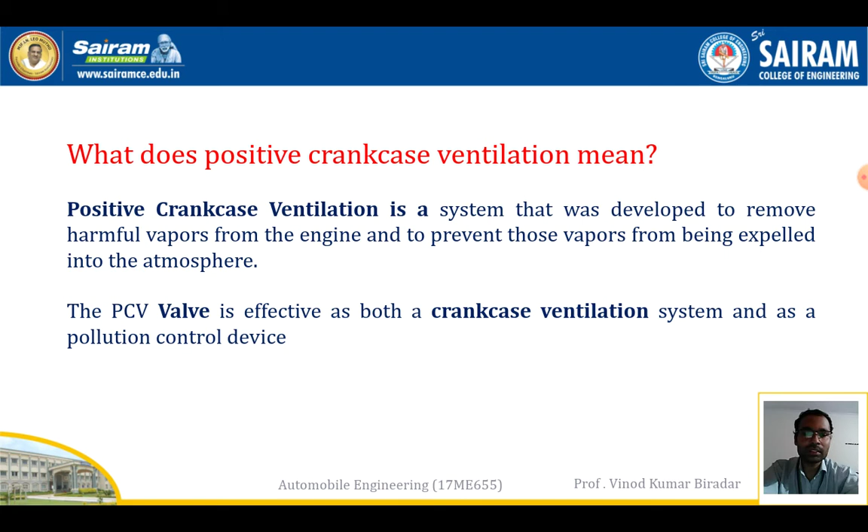It is shortly called PCV. The PCV valve is effective as both a crankcase ventilation system and a pollution control device. Is crankcase ventilation necessary in all vehicles? Yes, it is necessary. A positive crankcase ventilation system is a requirement for almost every gas-powered combustion engine found in cars. So it is necessary in almost all engines, but we have to use it properly.

So how does a crankcase ventilation system work? What is its main function? The main function is to allow the blow-by gases, consisting of the combustion products and the oil vapors, to be vented through a positive crankcase ventilation valve out of the crankcase. It separates the oil drops and oil mist from the ventilated air. Blow-by gases means harmful gases released by the vehicle, so it will control that. So we will study the working of this crankcase ventilation system.

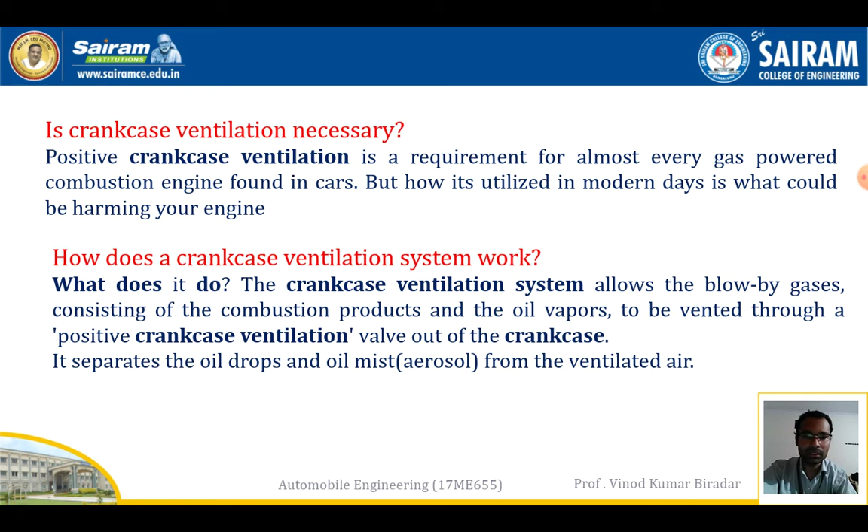So how do I lower the crankcase pressure in a vehicle? The best way to minimize the crankcase vapor pressure, the blow-by gas, is to seal the engine as efficiently as possible from the cylinder pressure. One way is to minimize the ring end gaps by custom setting and the end gaps on the top two rings to fit the way the engine will be run.

So normally in the combustion engine, the piston is in the cylinder, and it is not completely tight. Through the gap between the piston and the cylinder, the blow-by gas will be expelled out. To reduce that, this PCV valve is used.

Can the PCV valve be cleaned? Yes, if your vehicle's PCV valve is not working, you can clean it yourself by immersing it in a carburetor cleaner or solvent from your auto supply store. If there is a gummy deposit or discoloration on the valve, you can clean it yourself. No problem for that.

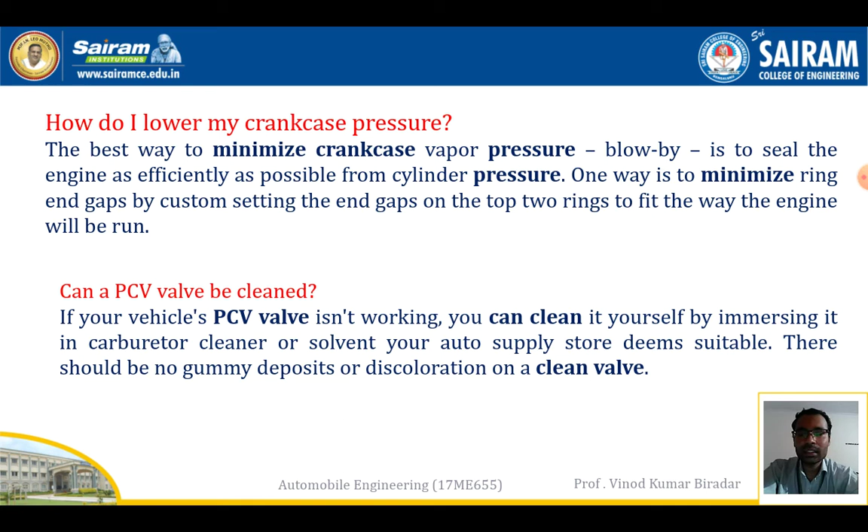Now from that gap, even in a new engine, gas escapes, also known as blowby gas. That gas, called blowby gases, will be released from the piston end. Older vehicles had a breather tube that vented these gases into the atmosphere. In those days there were no PCV systems; they released the gases directly into the environment, and that affected health. Modern vehicles are fitted with a PCV system, so nowadays it is not a problem.

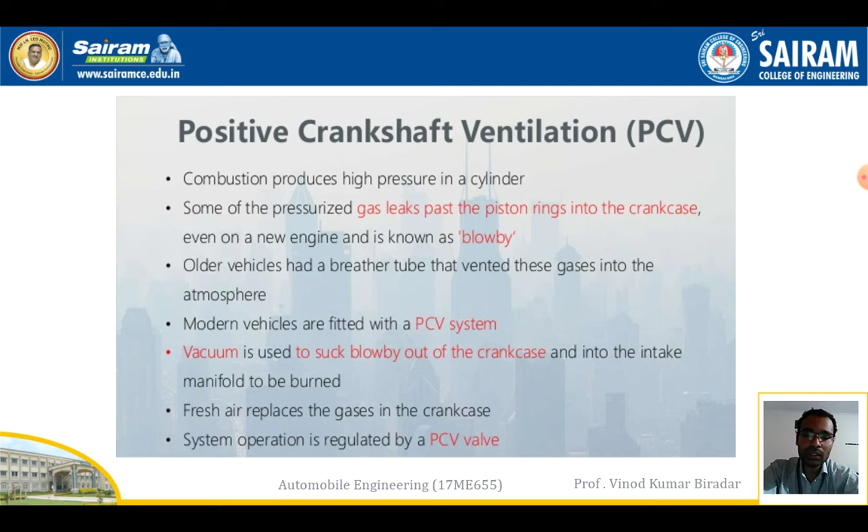The PCV valve is a spring-loaded device with an engine-specific orifice size, and the valve is sealed shut when the engine is stopped to prevent backfires. At engine idle speed, the maximum vacuum defeats spring pressure and the plunger moves to the other end of the valve, allowing a minimum vapor flow. At normal engine speed, the lower vacuum level allows the plunger to move to the central position, and the maximum vapor flow occurs.

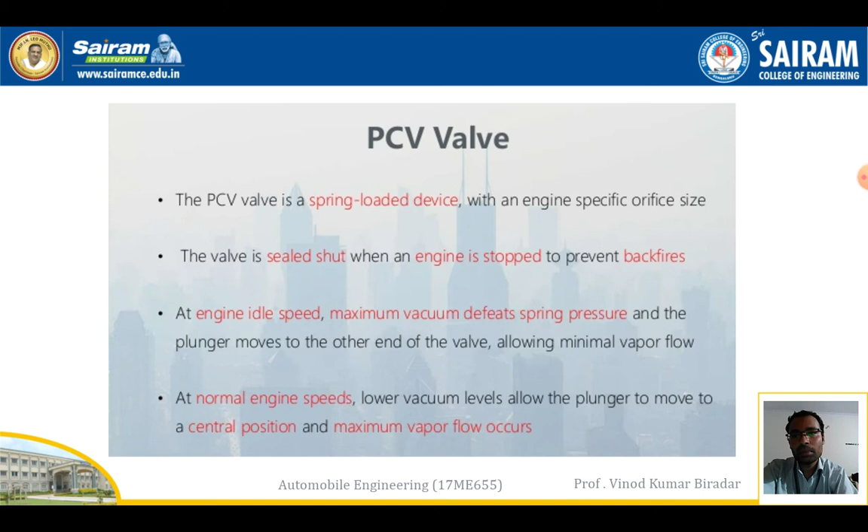The advantages of the positive crankcase ventilation system: it removes the crankcase emissions, the blowby gases in the crankcase, while running the vehicle. That is the main advantage. It also keeps the system free from moisture, and its mechanism is very important for preventing engine corrosion. In my opinion, this is the most important task of the PCV valve. By using the PCV valve we can control the pollutants, the waste gases produced by the vehicle.

There are disadvantages to this also. The main drawback is that blowby vapors could still back up at high engine speed and load and escape into the atmosphere through the oil filler cap or valve cover breather. Even if you use a PCV system, a little amount of blowby gas will be released into the atmosphere when the engine speed is high. That is one disadvantage.

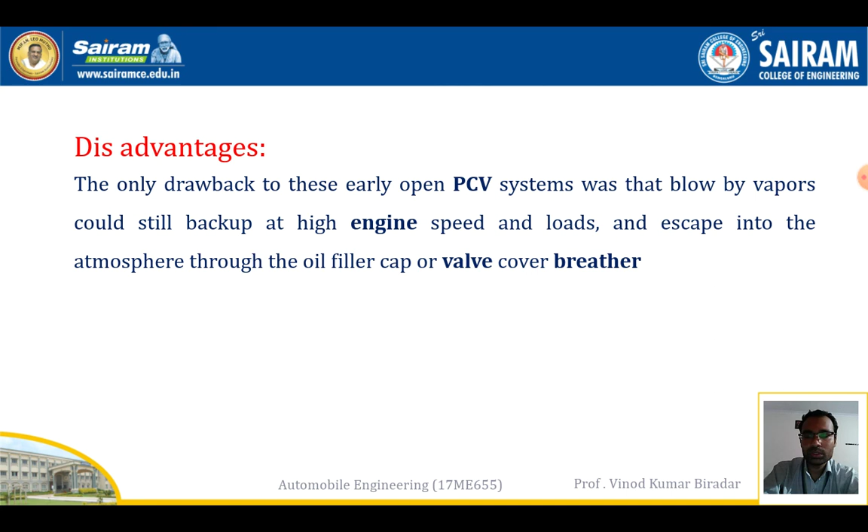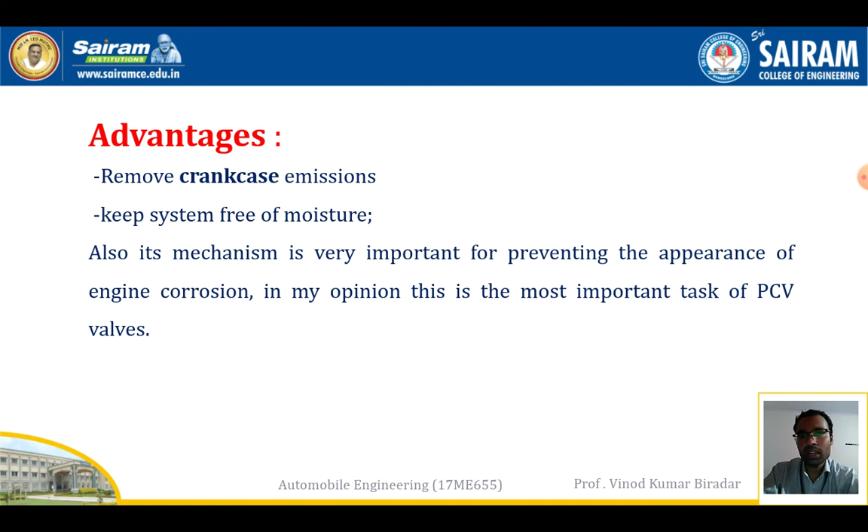This is very important for the PCV valve, and this question is very important: explain with a neat sketch the positive crankcase ventilation system. Just remember, it controls the harmful gases so they are not released into the environment. That is the main function. I hope you understand this.